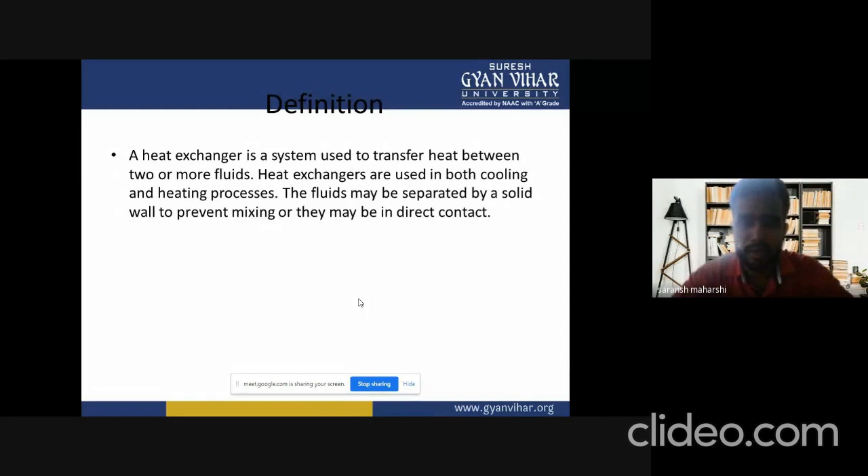Now we will discuss about examples of heat exchangers like automobile radiator, condenser, evaporators, air preheaters, and cooling tower.

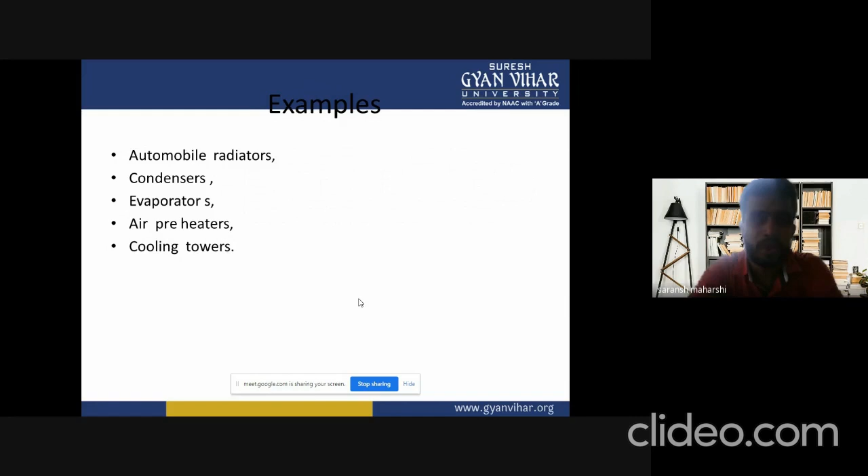Now we will discuss about purpose.

Heat exchangers are integral part of fuel cell systems for thermal management functions related to heating of incoming gas streams, exchange of heat from various flow streams, and maintenance of the uniformity of temperature. I repeat again, heat exchangers are integral parts of the fuel.

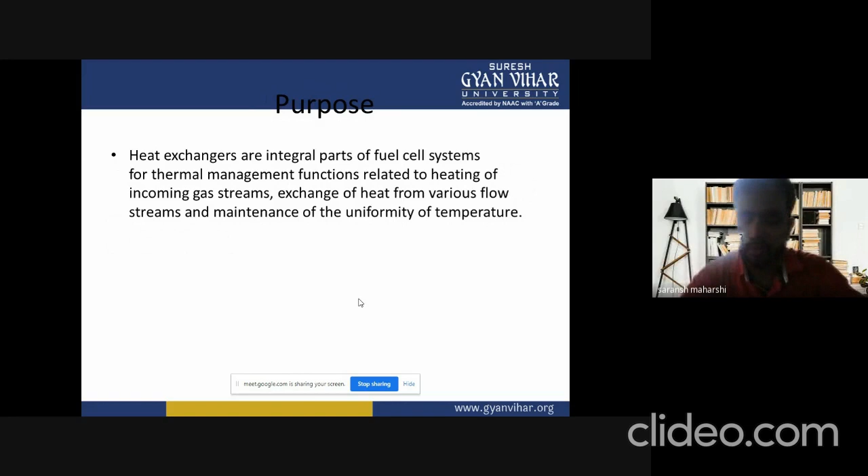Here we discuss about different types of heat exchanger like shell and tube heat exchanger. Next is plate heat exchanger. Third is plate fin heat exchanger, and fourth is phase change heat exchanger.

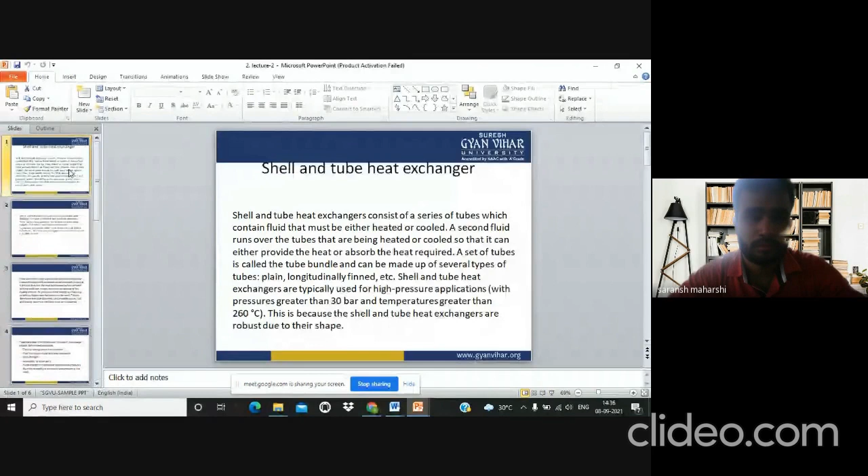Now we will discuss about shell and tube heat exchanger.

Shell and tube heat exchanger consist of a series of tubes which contain fluid that must be either heated or cooled. A second fluid runs over the tubes that are being heated or cooled so that it can either provide the heat or absorb the heat required.

A set of tubes is called the tube bundle and can be made up of several types of tubes, like plain, longitudinally finned, etc. Shell and tube heat exchangers are typically used for high pressure applications with pressure greater than 30 bar and temperature greater than 260 degrees centigrade. This is because the shell and tube heat exchanger is robust due to its shape.

Various thermal design features must be considered when designing the tubes in the shell and tube heat exchanger. There can be many variations on the shell and tube design.

Typically, the ends of each tube are connected to plenums, sometimes called water boxes, through holes in the tube sheets. The tubes may be straight or bent in the shape of a U, called U-tubes.

Tube diameter. Using a small tube diameter makes the heat exchanger both economical and compact. However, it is more likely for the heat exchanger to foul faster, and small size makes mechanical cleaning of the fouling difficult. To prevail over the fouling and cleaning problems, larger tube diameters can be used. Thus, to determine the tube diameter, the available space, cost, and fouling nature of the fluids must be considered.

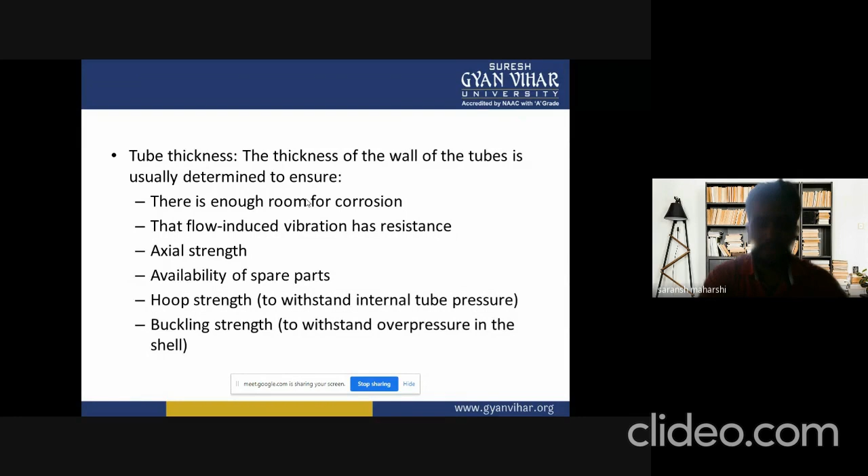Tube thickness. The thickness of the wall of the tubes is usually determined to ensure there is enough room for corrosion, that flow induced vibration has resistance, axial strength, availability of spare parts, hoop strength, and to withstand internal tube pressure. And last but not least, buckling strength to withstand overpressure in the shell.

Now we will discuss about tube length and tube pitch. First of all, tube length. Heat exchangers are usually cheaper when they have a smaller shell diameter and long tube. Thus, typically, there is an aim to make the heat exchanger as long as physically possible, limits not exceeding production capabilities. However, there are many limitations, including space available at the installation site and the need to ensure tubes are available in lengths that are twice the required length, so they can be withdrawn and replaced. Also, long, thin tubes are difficult to take out and replace.

Tube pitch. When designing the tubes, it is practical to ensure that the tube pitch, the center to center distance of adjoining tubes, is not less than 1.25 times the tube's outside diameter. A larger tube pitch leads to a larger overall shell diameter, which leads to a more expensive heat exchanger.

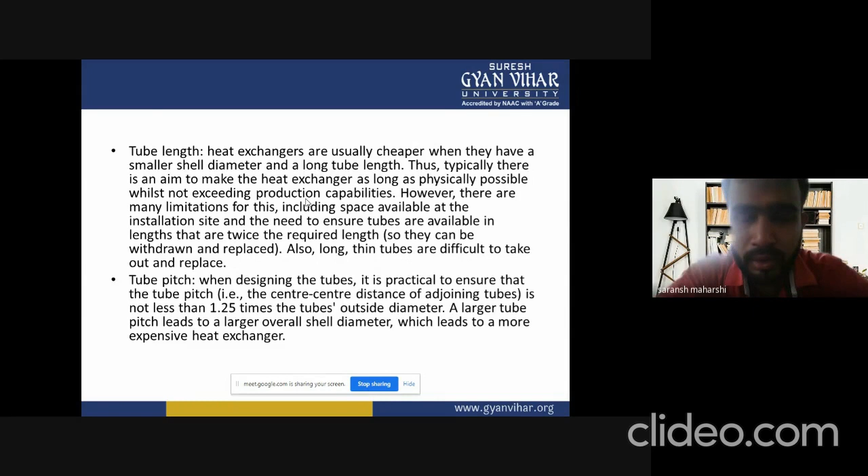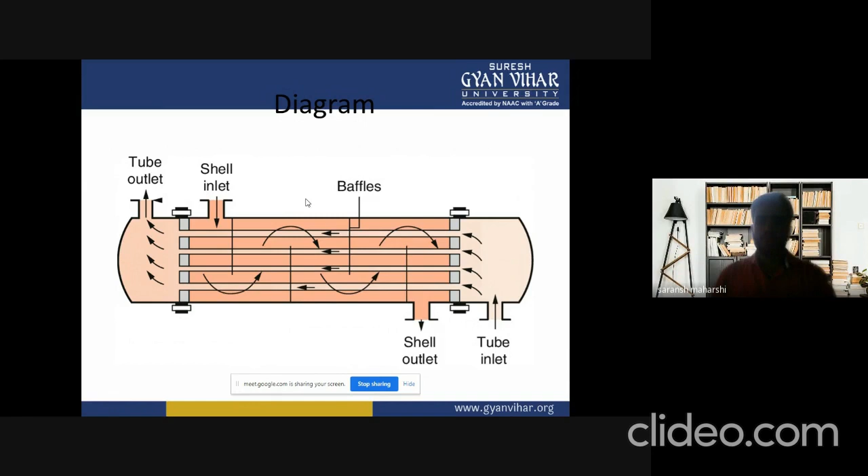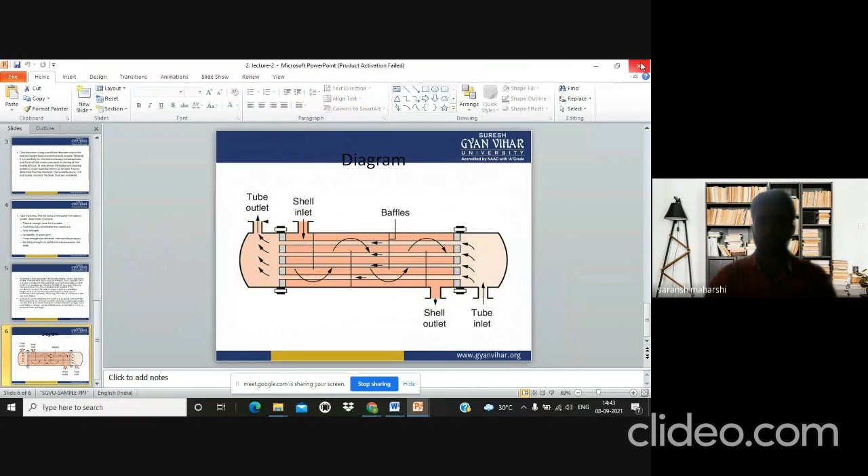Advances in gasket and brazing technology have made the plate type heat exchanger increasingly practical. In HVAC applications—which stands for heating, ventilation and air conditioning—large heat exchangers of these types are called plate and frame.

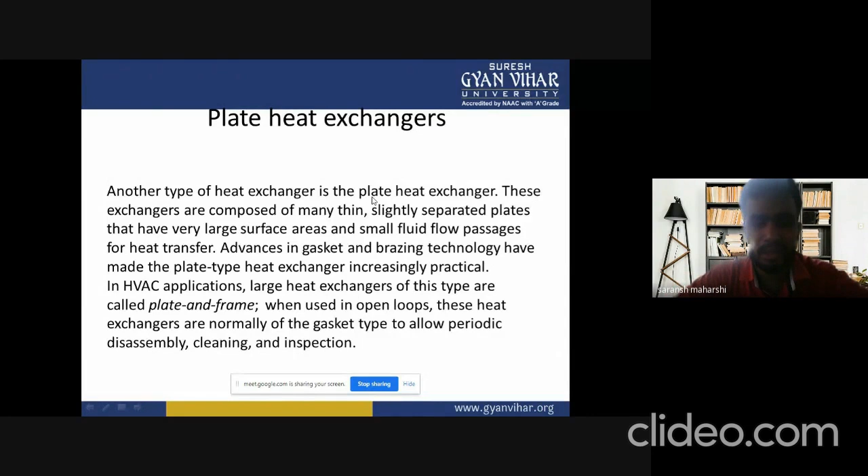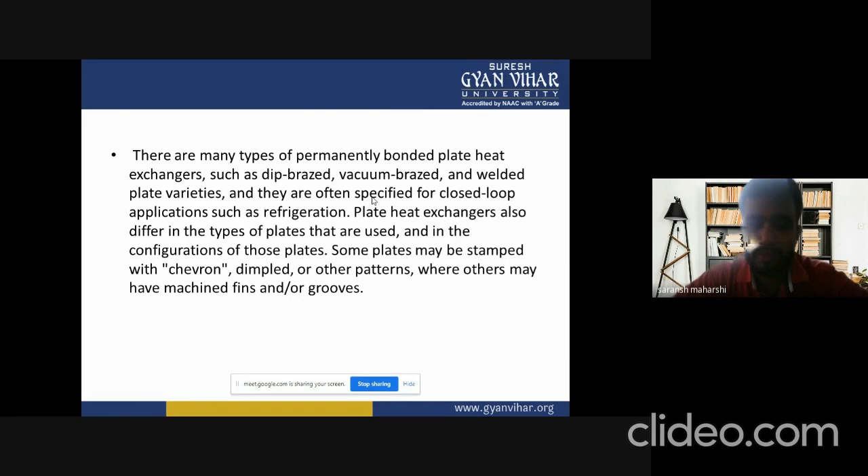When used in open loops, these heat exchangers are normally of the gasket type to allow periodic disassembly, cleaning, and inspections. There are many types of permanently bonded plate heat exchangers, such as the dip brazed, vacuum brazed, and welded plate varieties, and they are often specified for closed loop applications such as refrigeration. Plate heat exchangers also differ in the types of plates used and in their configurations. Some plates may be stamped with chevron, dimpled, or other patterns, while others may have machined fins and grooves.

When compared to shell and tube exchangers, the stacked plate arrangement typically has lower volume and cost. Another difference between the two is that plate exchangers typically serve low to medium pressure fluids, compared to the medium and high pressure handled by shell and tube exchangers.

A third and important difference is that plate exchangers employ more countercurrent flow rather than cross-current flow, which allows lower approach temperature differences, higher temperature changes, and increased efficiencies.

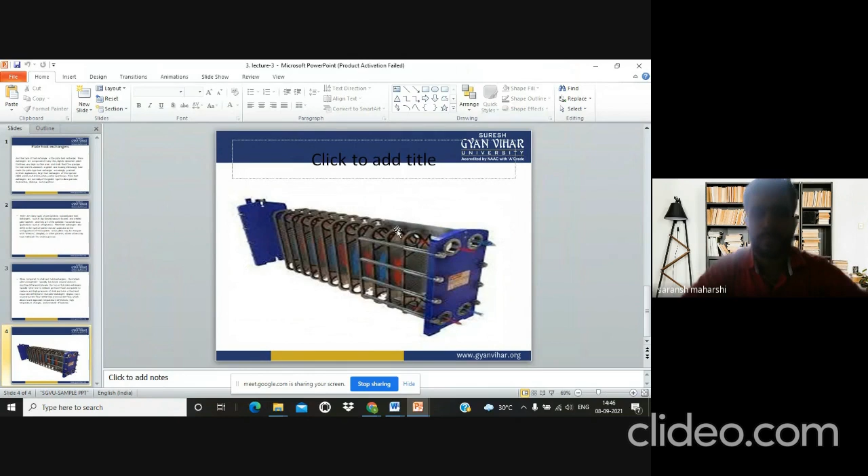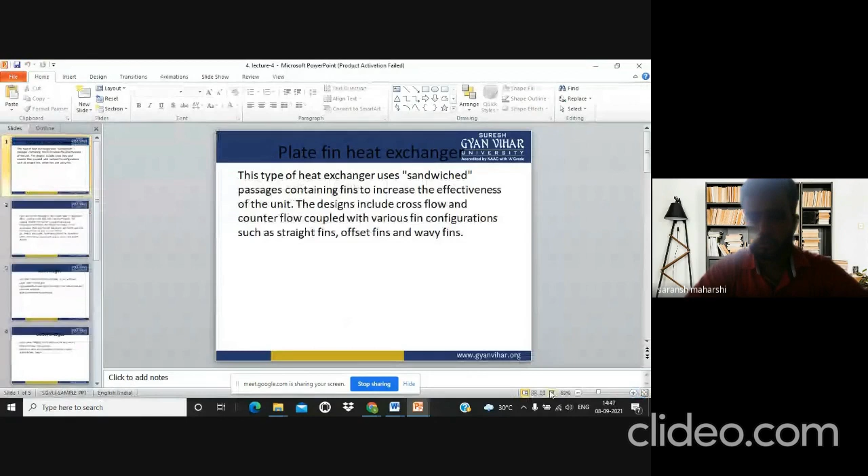Plate fin heat exchanger: this type of heat exchanger uses sandwiched passages containing fins to increase the effectiveness of the unit. The design includes crossed flow and counterflow coupled with various fin configurations, such as straight fins, offset fins and wavy fins.

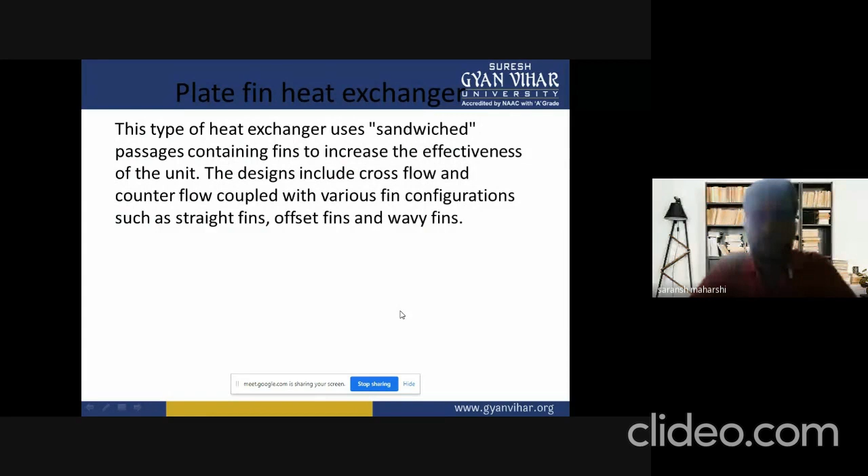Plate and fin exchangers are usually made from aluminum alloys, which provide high heat transfer efficiency. The material enables the systems to operate at lower temperature differences and reduces the weight of the equipment. Plate and fin heat exchangers are mostly used for low temperature services such as natural gas, helium, or oxygen liquefaction plants, air separation plants, and transport industries such as motor and aircraft engines.

Advantages: high heat transfer efficiency, especially in gas treatment. Large heat transfer area. Approximately 9 times lighter in weight than shell and tube exchangers. Able to withstand high pressure.

Disadvantages: might cause clogging as the pathways are very narrow. Difficult to clean the pathways, and aluminum alloys are susceptible to mercury liquid embrittlement failure.

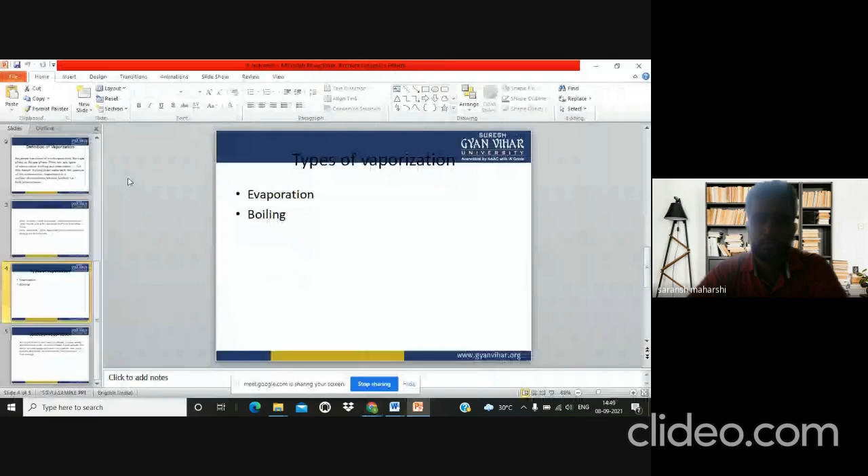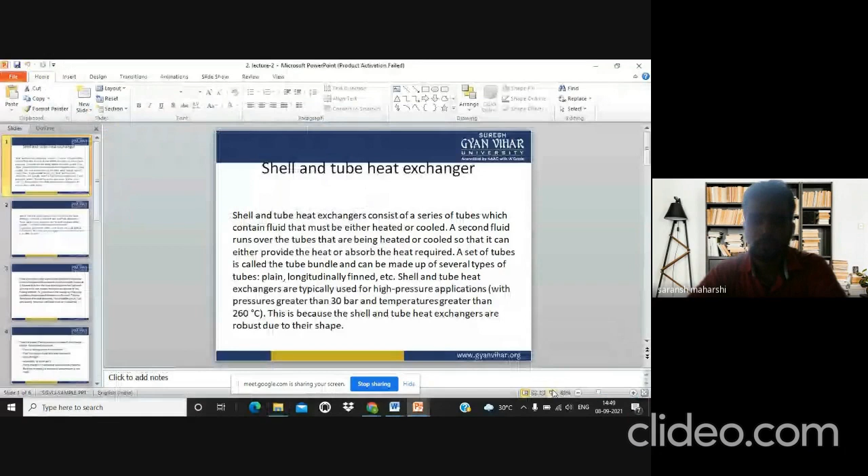Shell and tube heat exchanger. A shell and tube heat exchanger consists of a series of tubes which contain fluid that must be either heated or cooled, so that it can either provide the heat or absorb the heat required. A set of tubes is called the tube bundle and can be made of several types of tubes.

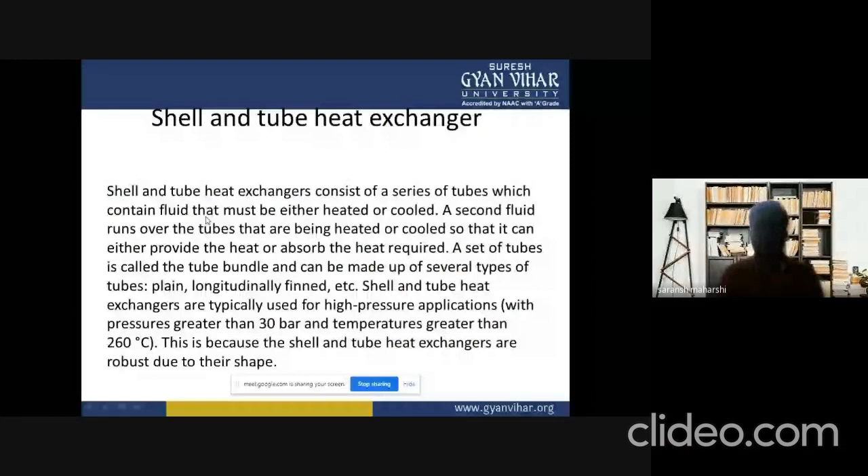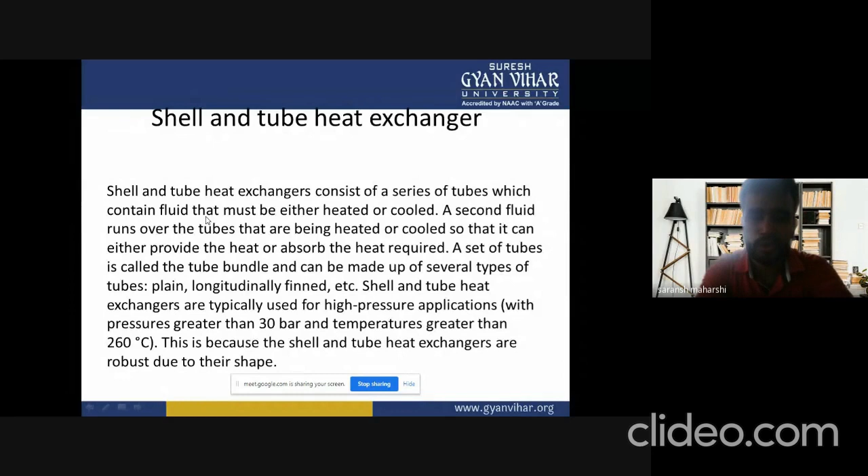Plain, longitudinally finned, etc. Shell and tube exchangers are typically used for high pressure applications with pressure greater than 30 bar and temperature greater than 260 degrees centigrade. This is because shell and tube heat exchangers are robust due to their shape.

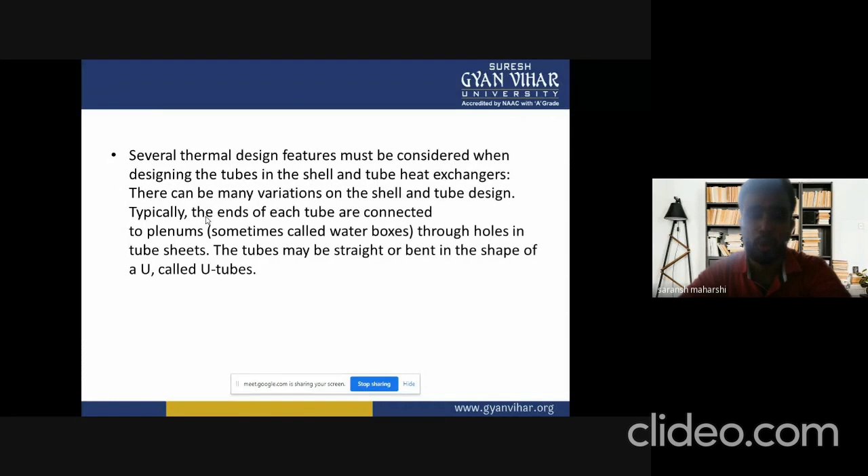Several thermal design features must be considered when designing the tubes in the shell and tube heat exchanger. There can be many variations on the shell and tube design. Typically, the ends of each tube are connected to plenums, sometimes called water boxes, through holes in the tube sheets. The tubes may be straight or bent in the shape of a U, called U-tubes.

Tube diameter: using a small tube diameter makes a heat exchanger both economical and compact. However, it is more likely for the heat exchanger to foul up faster, and a small size makes mechanical cleaning of the fouling difficult. To overcome fouling and cleaning problems, larger tube diameters can be used. Thus, to determine the tube diameter, the available space, cost, and fouling nature of the fluids must be considered.

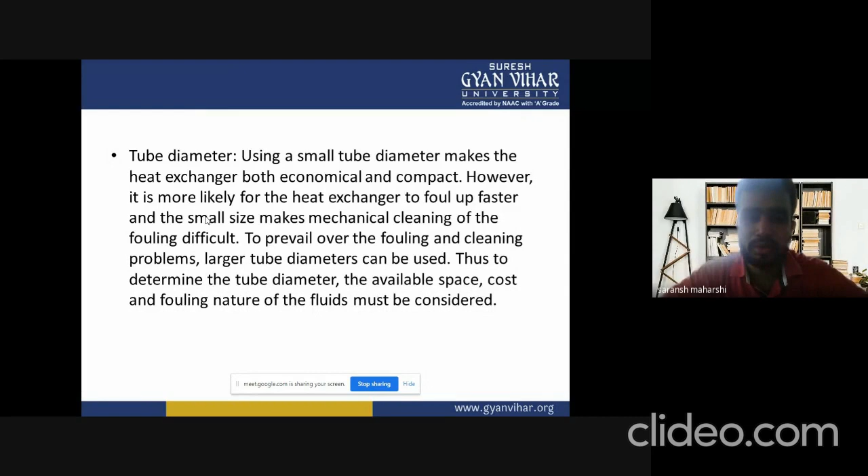Tube thickness: the thickness of the wall of the tubes is usually determined to ensure, first, there is enough room for corrosion. Next, that flow-induced vibration has resistance. Third is axial strength. Fourth is availability of spare parts. Next is hoop strength, also called the ability to withstand internal tube pressure. And the last is buckling strength, to withstand over pressure in the shell.

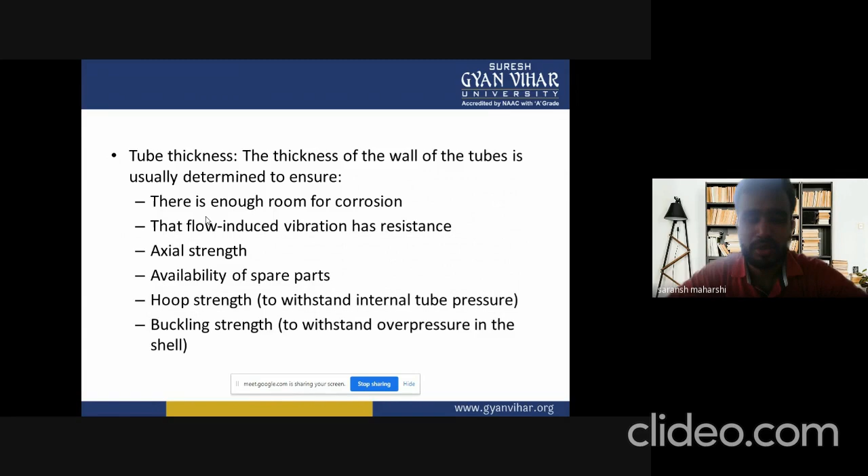Tube length: heat exchangers are usually cheaper when they have a small shell diameter and long tube length. Thus, typically, there is an aim to make the heat exchanger as long as physically possible while not exceeding production capabilities. However, there are many limitations for this, including space available at the installation site and the need to ensure tubes are available in lengths twice the required length, so that they can be withdrawn and replaced. Also, long, thin tubes are difficult to take out and replace.

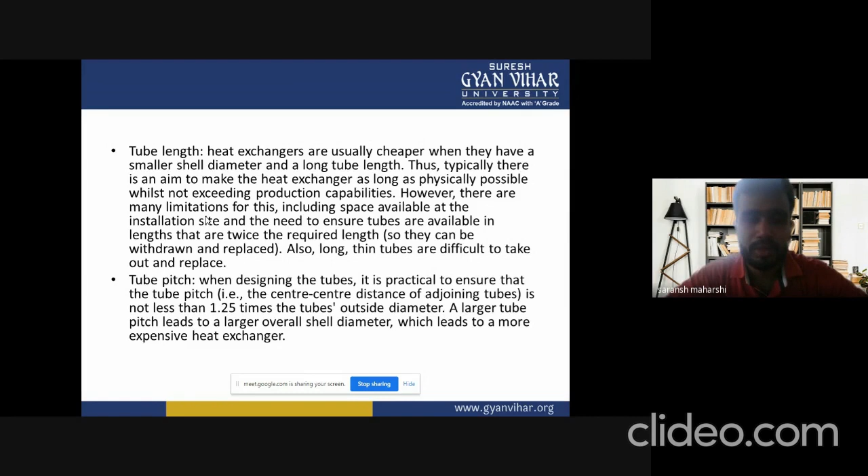Tube pitch: when designing the tubes, it is practical to ensure that the tube pitch—the center-to-center distance of adjoining tubes—is not less than 1.25 times the tubes' outside diameter. A larger tube pitch leads to a larger overall shell diameter, which leads to a more expensive heat exchanger. That's enough.

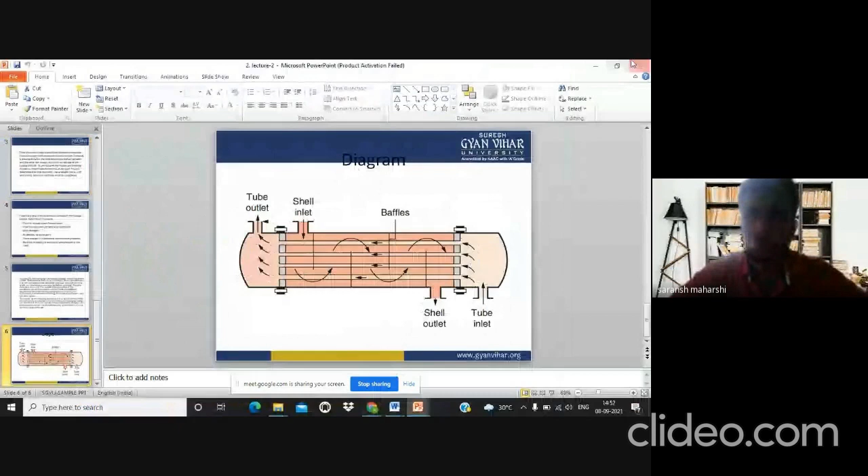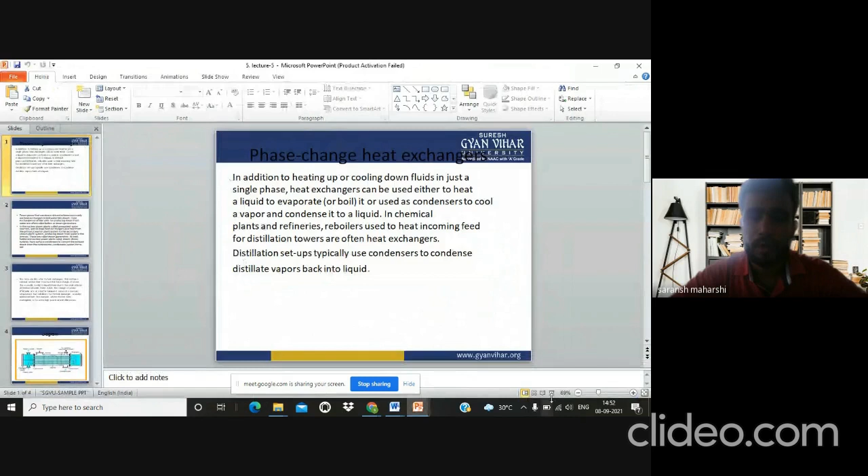And now we will discuss phase change heat exchangers. In addition to heating up or cooling down fluid in a single phase, heat exchangers can be used either to heat a liquid to evaporate it or used as condensers to cool a vapor and condense it to liquid.

In chemical plants and refineries, reboilers used to heat incoming feed for distillation towers are often heat exchangers. Distillation set-ups typically use condensers to condense distillate vapors back into liquid.

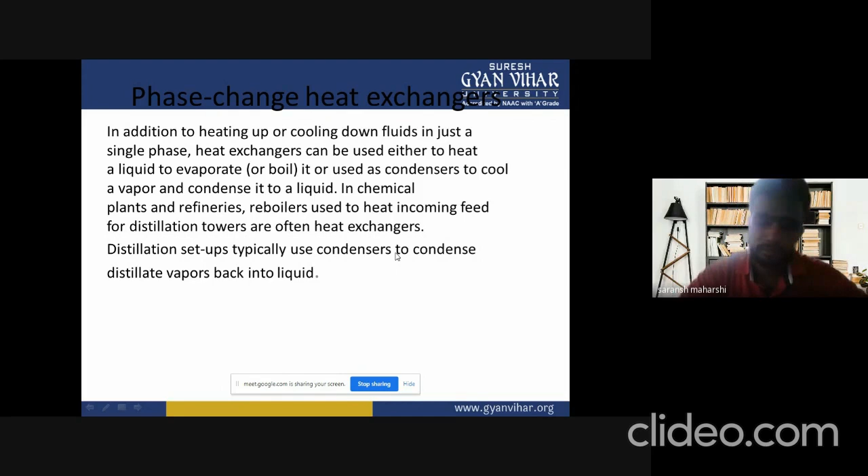Power plants that use steam driven turbines commonly use heat exchangers to boil water into steam. Heat exchangers or similar units for producing steam from water are often called boilers or steam generators.

In the nuclear power plants called pressurized water reactors, especially large heat exchangers pass heat from the primary reactor plant systems to the secondary steam plant systems, producing steam from water in the process. They are called steam generators.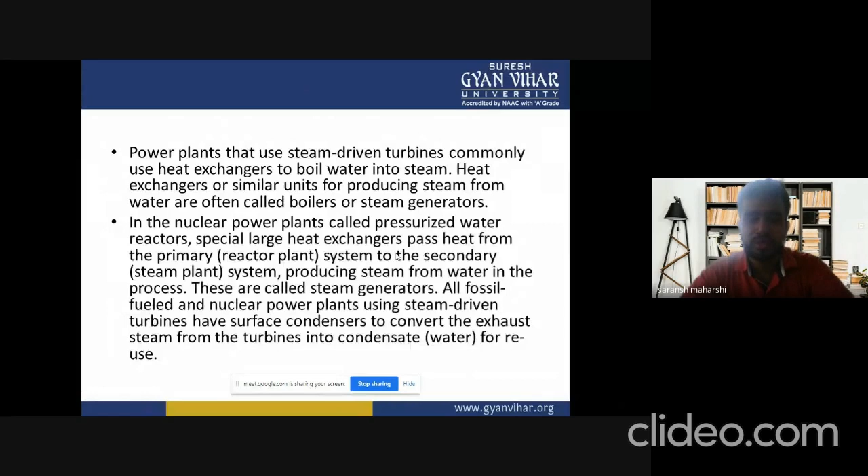All fossil fuel and nuclear power plants using steam-driven turbines have surface condensers to convert the exhaust steam from the turbines into condensate for reuse.

The term can also refer to heat exchangers that contain a material within their structure that has a change of phase. This is usually a solid to liquid phase due to the small volume differences between these states. This change of phase effectively acts as a buffer because it occurs at a constant temperature, but it still allows for the heat exchanger to accept additional heat.

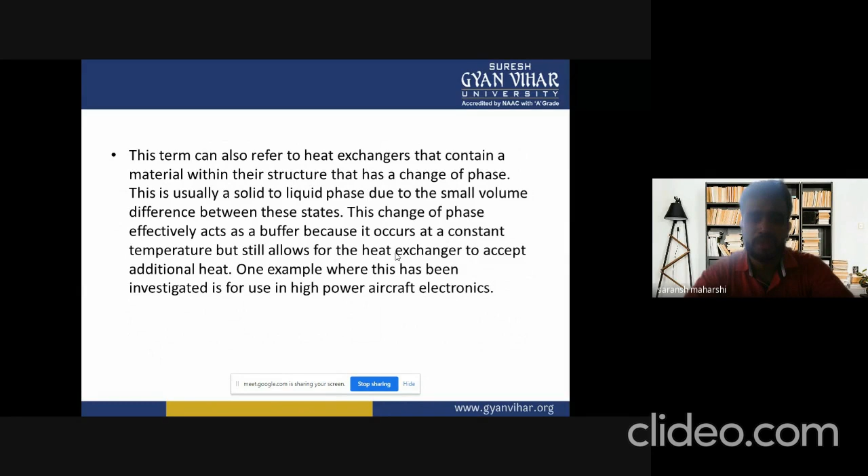One example where this has been investigated is for use in high power aircraft electronics.

Logarithmic mean temperature difference. Here we will discuss the introduction, formula, and so on. First of all we will discuss the introduction. The logarithmic mean temperature difference, which is called LMTD, is used to determine the temperature driving force for heat transfer in flow systems, most notably in heat exchangers.

The LMTD, log mean temperature difference, is a logarithmic average of the temperature difference between the hot and cold feeds at each end of the double pipe exchanger. For a given heat exchanger with constant area and heat transfer coefficient, the larger the LMTD, the more heat is transferred.

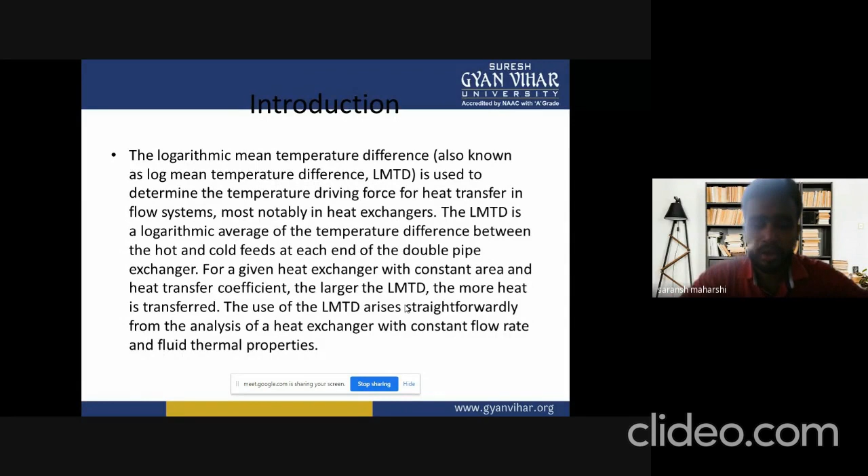The use of the LMTD arises straightforwardly from the analysis of a heat exchanger with constant flow rate and fluid thermal properties. We assume that a generic heat exchanger has two ends, which we call A and B, at which the hot and cold streams enter or exit on either side.

Then the LMTD is defined by the logarithmic mean as follows: LMTD = (ΔTA − ΔTB) / ln(ΔTA / ΔTB) = (ΔTA − ΔTB) / (ln ΔTA − ln ΔTB), where ΔTA is the temperature difference between the two streams at end A and ΔTB is the temperature difference between the two streams at end B.

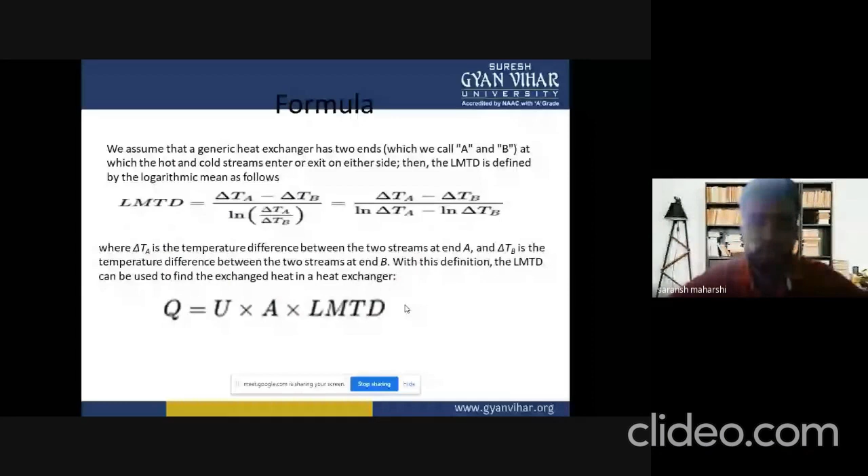With this definition, the LMTD can be used to find the exchanged heat in a heat exchanger: Q = U × A × LMTD, where Q is the exchanged heat duty in watts, U is the heat transfer coefficient in watts per Kelvin per square meter, and A is the exchange area. Note that estimating the heat transfer coefficient may be quite complicated.

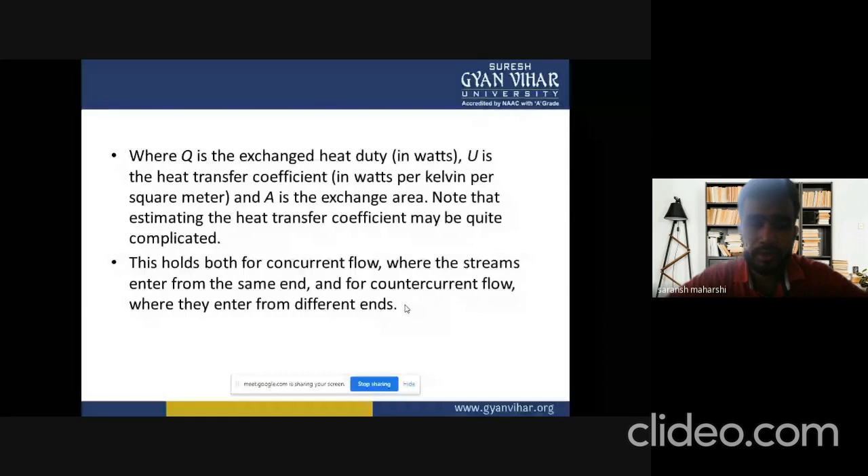This holds both for concurrent flow, where the streams enter from the same end, and for countercurrent flow, where they enter from different ends.

Assumptions and limitations. It has been assumed that the rate of change for the temperature of both fluids is proportional to the temperature difference. This assumption is valid for fluids with a constant specific heat, which is a good description of fluids changing temperature over a relatively small range. However, if the specific heat changes, the LMTD approach will no longer be accurate.

A particular case for the LMTD are condensers and reboilers, where the latent heat associated with phase change is a special case of the hypothesis. For a condenser, the hot fluid inlet temperature is then equivalent to the hot fluid exit temperature.

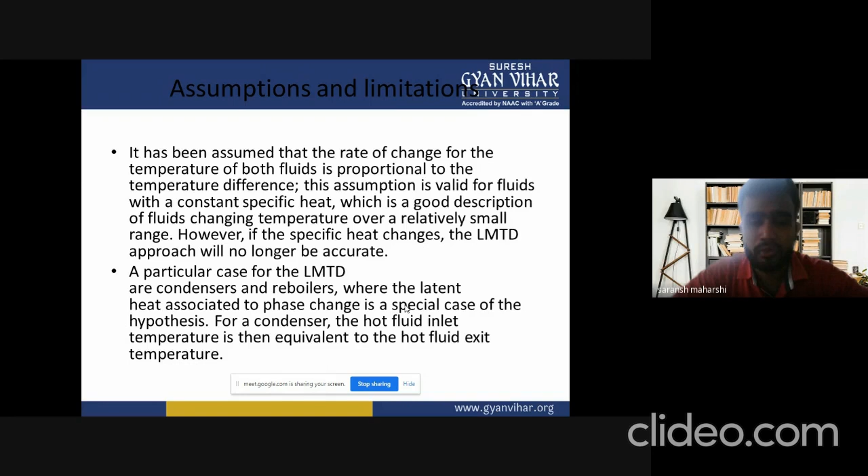It has also been assumed that the heat transfer coefficient U is constant and not a function of temperature. If this is not the case, the LMTD approach will again be less valid. The LMTD is a steady state concept and cannot be used in dynamic analysis.

In particular, if the LMTD were to be applied on a transient in which, for a brief time, the temperature difference had different signs on the two sides of the exchanger, the argument to the logarithmic function would be negative, which is not allowable.

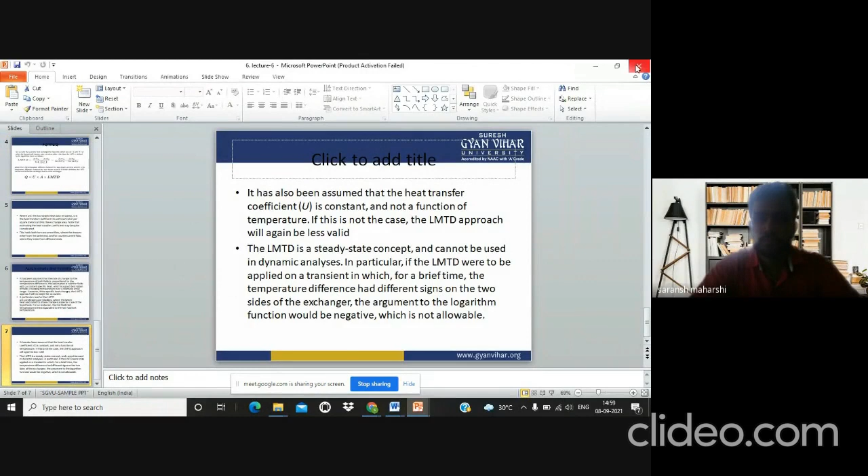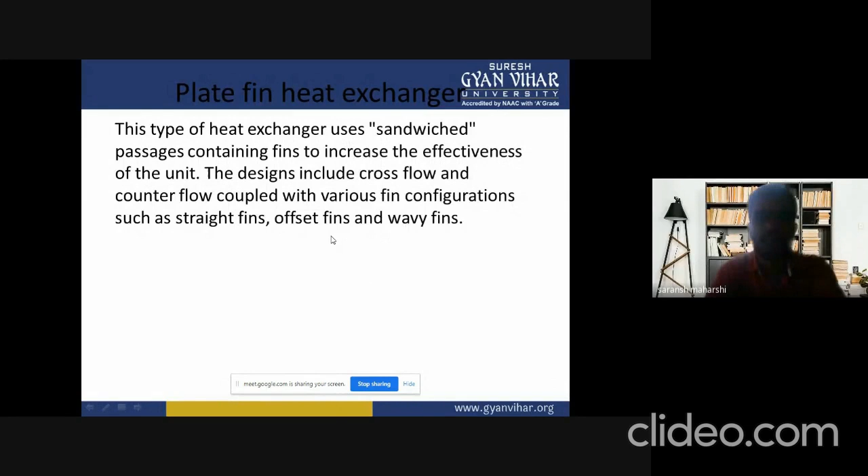Plate and fin heat exchanger. This type of heat exchanger uses sandwiched passages containing fins to increase the effectiveness of the unit. The design includes cross flow and counter flow coupled with various fin configurations such as straight fins, offset fins, and wavy fins.

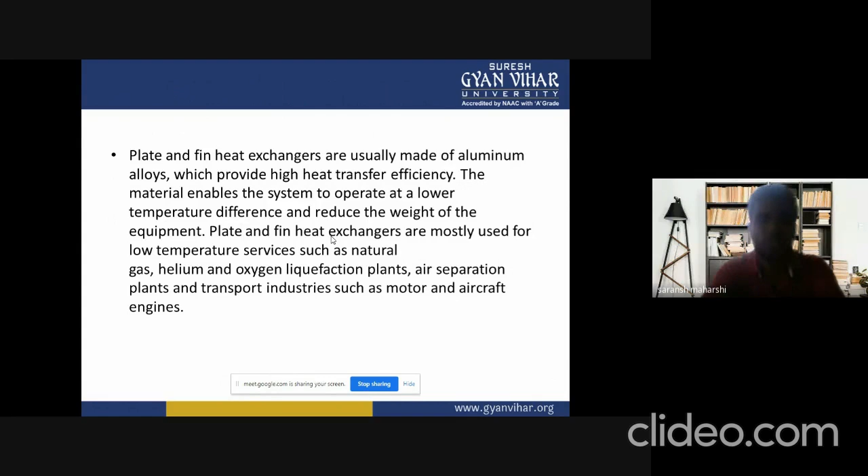Plate and fin heat exchangers are usually made of aluminum alloys, which provide high heat transfer efficiency. The material enables the systems to operate at a lower temperature difference and reduces the weight of the equipment. Plate and fin heat exchangers are mostly used for low temperature services such as natural gas, helium and oxygen liquefaction plants, air separation plants, and transport industries such as motor and aircraft engines.

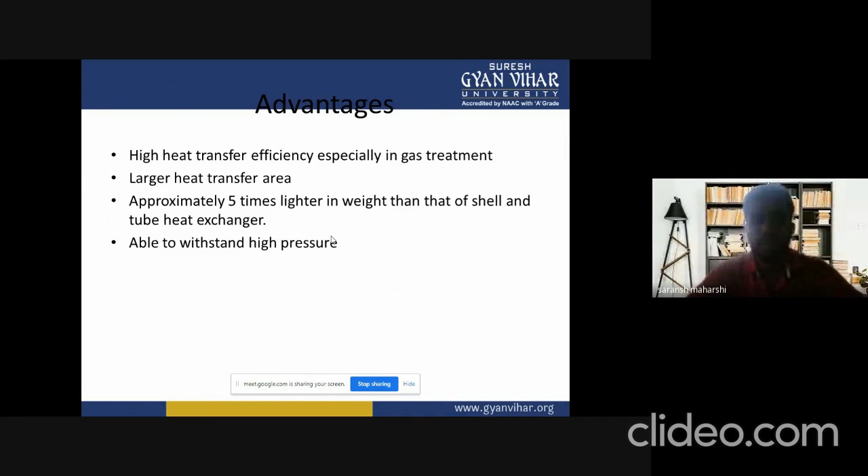Advantages: higher heat transfer efficiency, especially in gas treatment. Next is larger heat transfer area. Next is approximately 5 times lighter in weight than a shell and tube heat exchanger. And the next is able to withstand high pressure.

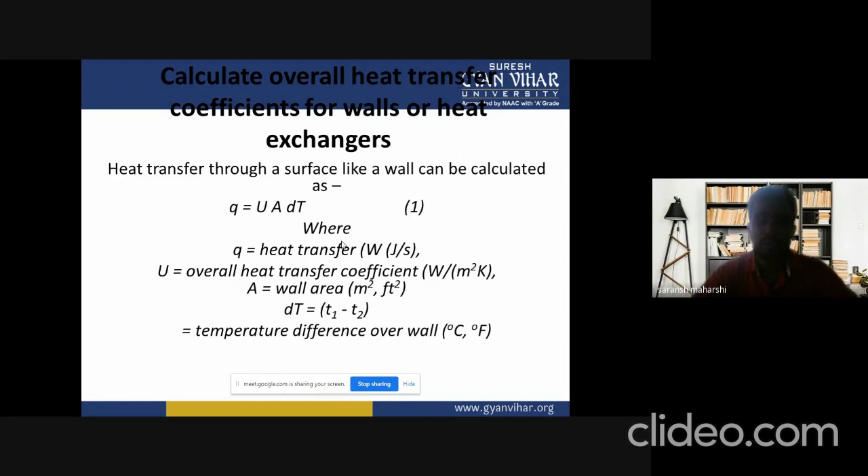Calculate overall heat transfer coefficient for walls or heat exchangers, and next is heat transfer thermal resistance. First of all, we will discuss calculating the overall heat transfer coefficient for walls or heat exchangers. Heat transfer through a surface like a wall can be calculated as Q = U × A × dT, where Q is heat transfer in watts (joules per second), U is the overall heat transfer coefficient in W/(m²·K), A is the wall area in m² or ft², and dT is the temperature difference T1 − T2 over the wall, in degrees Celsius or Fahrenheit.

The overall heat transfer coefficient for a multi-layered wall, pipe or heat exchanger with fluid flow on each side of the wall can be calculated as 1/(U·A) = 1/(hci·Ai) + Σ(sn/(kn·An)) + 1/(hco·Ao). This is equation number 2, where U is the overall heat transfer coefficient in W/(m²·K), kn is the thermal conductivity of the material in layer n in W/(m·K), hci,o is the inside or outside wall individual fluid convection heat transfer coefficient, and sn is the thickness of layer n in meters or feet.

This slide, I repeat this slide.

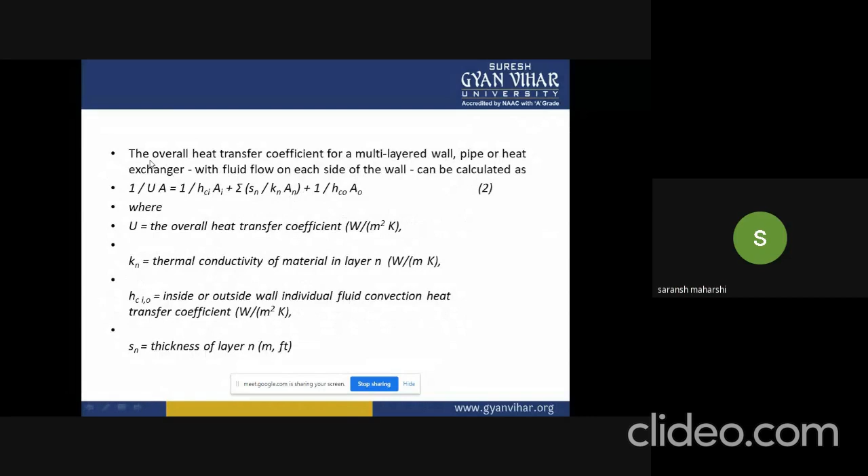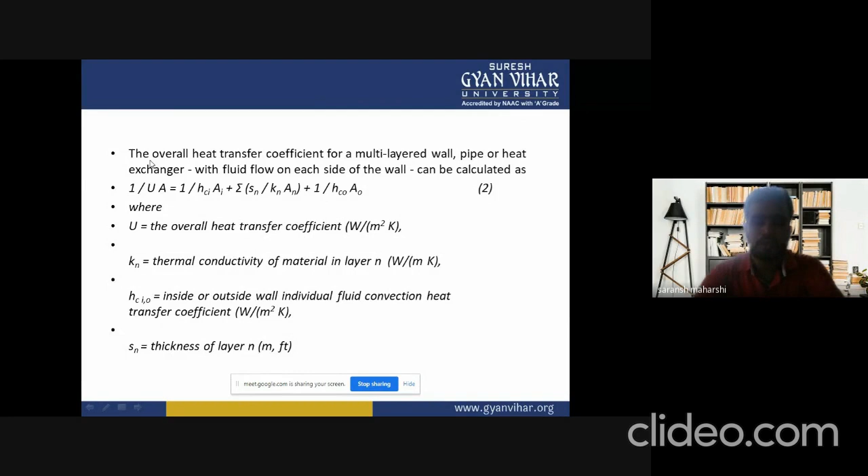The overall heat transfer coefficient for a multi-layer wall, pipe or heat exchanger with fluid flow on each side of the wall can be calculated as 1/(U·A) = 1/(hci·Ai) + Σ(sn/(kn·An)) + 1/(hco·Ao). This is equation number 2, where U is the overall heat transfer coefficient in W/(m²·K), kn is the thermal conductivity of the material in layer n in W/(m·K), hci,o is the inside or outside wall individual fluid convection heat transfer coefficient in W/(m²·K), and sn is the thickness of layer n in meters.

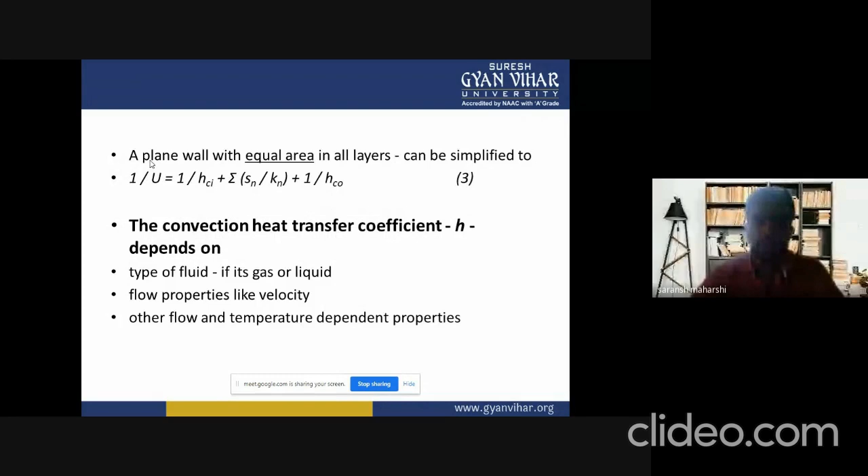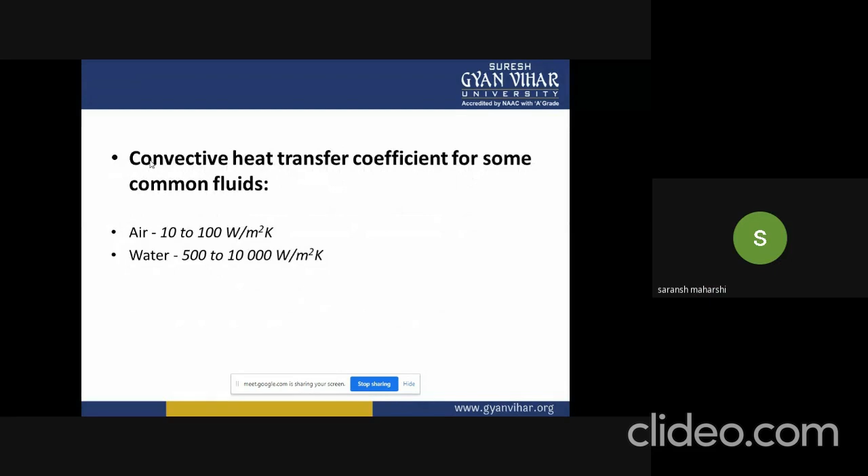A plane wall with equal area in all layers can be simplified to 1/U = 1/hci + Σ(sn/kn) + 1/hco. The convection heat transfer coefficient h depends on the type of fluid, gas or liquid, flow properties like velocity, and other flow and temperature dependent properties. Convective heat transfer coefficients for some common fluids: air 10 to 100 W/(m²·K), and water 500 to 10,000 W/(m²·K).

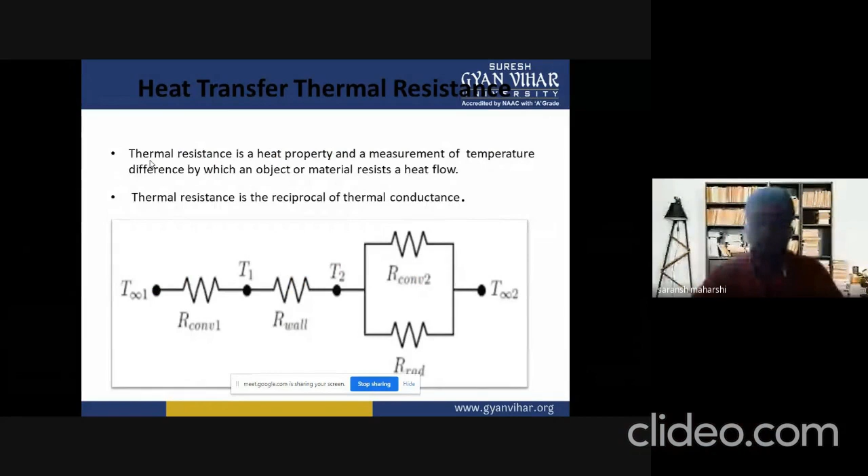Heat transfer thermal resistance. Thermal resistance is a heat property and a measurement of the temperature difference by which an object or material resists a heat flow. Thermal resistance is the reciprocal of the thermal conductance, where T∞1 (convective 1), wall T1, T2 (convective 2) and T∞2 are shown. Thermal resistance can be expressed as R = 1/U, where R is the heat transfer resistance.

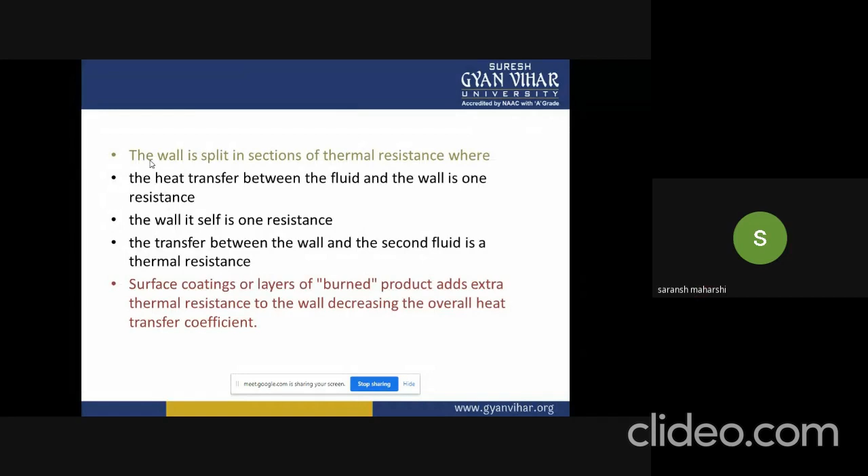A wall is split in sections of thermal resistance, where the heat transfer between the fluid and the wall is one resistance. The wall itself is one resistance. The transfer between the wall and the second fluid is a thermal resistance, and surface coatings or layers of burnt products add extra thermal resistance to the wall, decreasing the overall heat transfer coefficient.